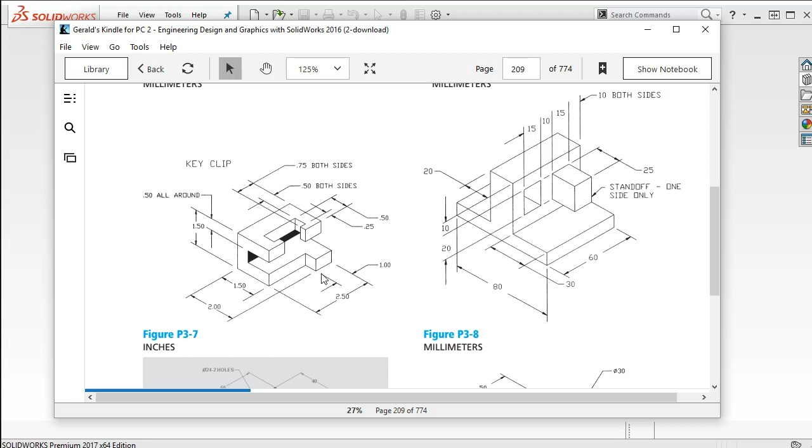Okay, figure P3-7. We have material thickness 1/2 inch all the way around. There are some manufacturing challenges with this one, so I want to take a look at those. But I think we can go ahead and build the C shape and add on the little tab and then make the cut through.

So I've switched to SolidWorks 2017, and we'll do a new part. This is in inches. And so far we're still kind of leaning towards staying in the front plane. So where 2016 went kind of neutral, the feedback from the users brought back some more of the colors and contrast, but for the most part very similar to 2016.

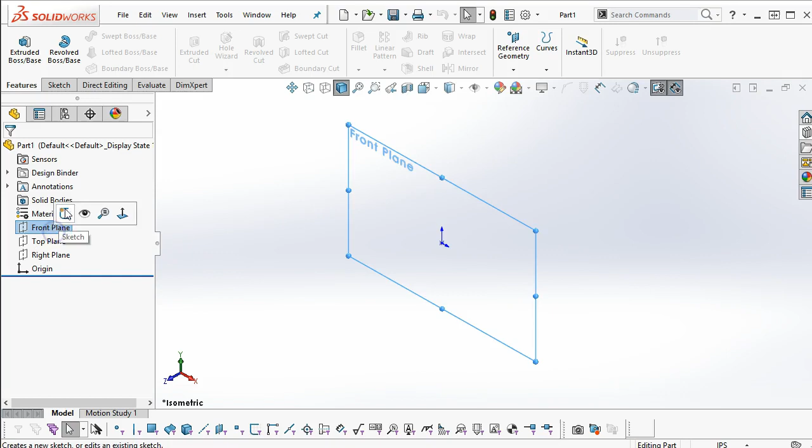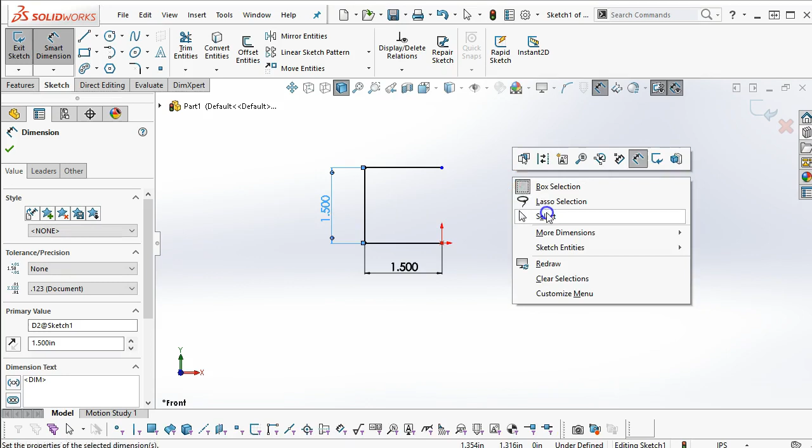So we'll open up our sketch, and it's your choice to do the thin feature or the offset. So we have a distance of 1.5 and a height of 1.5. Okay, and then in this case I'm going to go with the 2 points and make those vertical. Alright, so just to run through the thin feature again, things to watch out for. Go back to the front plane so that I can check my direction is correct.

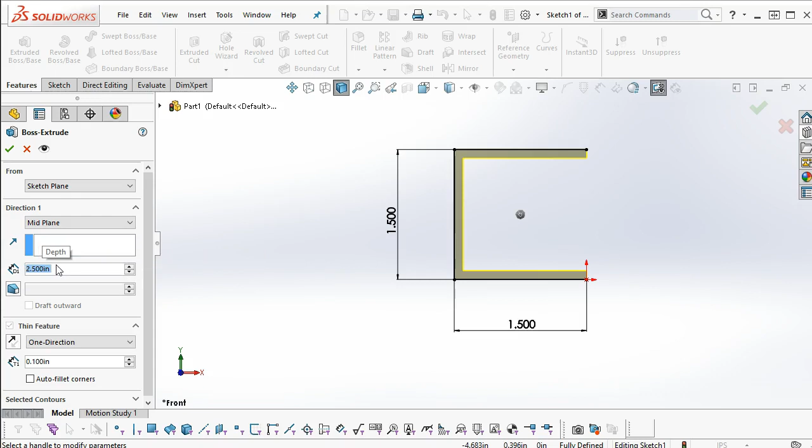So no great advantage to doing a mid plane on this one for 2.5, but let's go ahead and slip it in there. So 2.5 on the depth, and then 0.5 on the thickness of the material, and we go ahead and accept. Alright, so that gives me the C shape. I'll open up a sketch on the bottom, and again I'm not having this rotate into position.

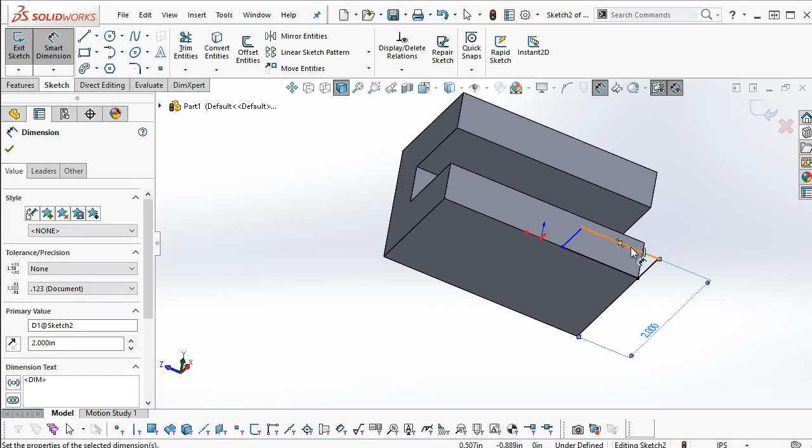If it does rotate into position, we can just rotate it back a little bit and make the adjustment. But getting used to sketching in that 3D space out of position, not normal to the sketch, that comes in handy. So we're going to extrude. I haven't used up to vertex, so let's go to a vertex, and we'll bring it up to that point.

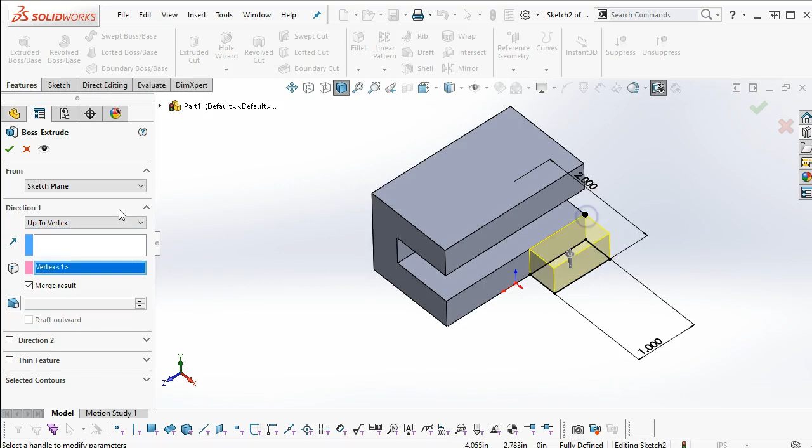Up to surface, up to next might work. Up through all should bring it up. So let's see what the other ones do. Through all goes and finds the last piece of geometry. Up to next, not real happy. If it doesn't show the preview, probably not going to work. Up to vertex we just did. Up to surface would be the selection, and the last three really don't make a good fit for this geometry. So up to vertex, and we accept it.

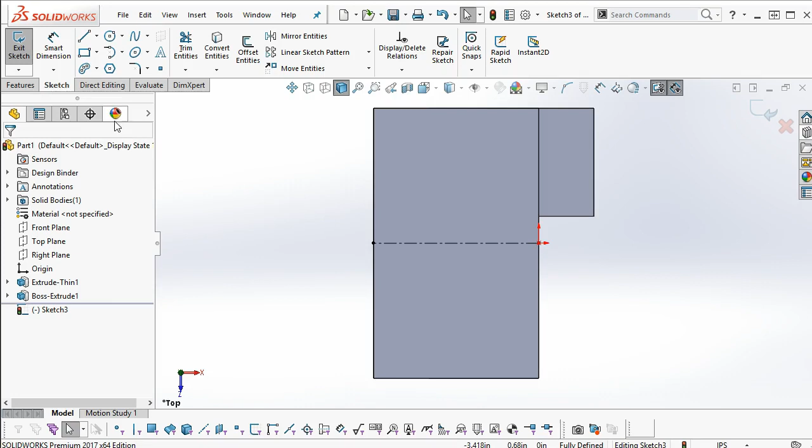And then let's go Control 5 or normal to, Control 8. I'm going to go ahead with a center line on this one, and we're making the cut. So we add 1/2 inch and 0.75 on both sides, giving me the symmetry. So I'll sketch my T shape, and not entirely sure that I want the midpoint, so I'm going to come off that midpoint just a little bit.

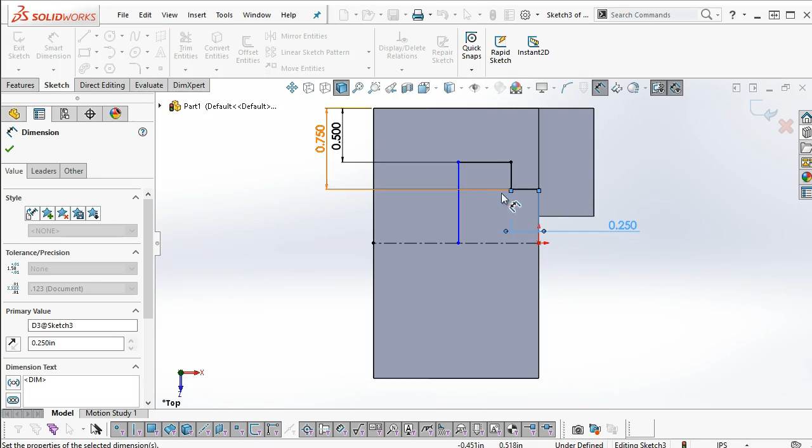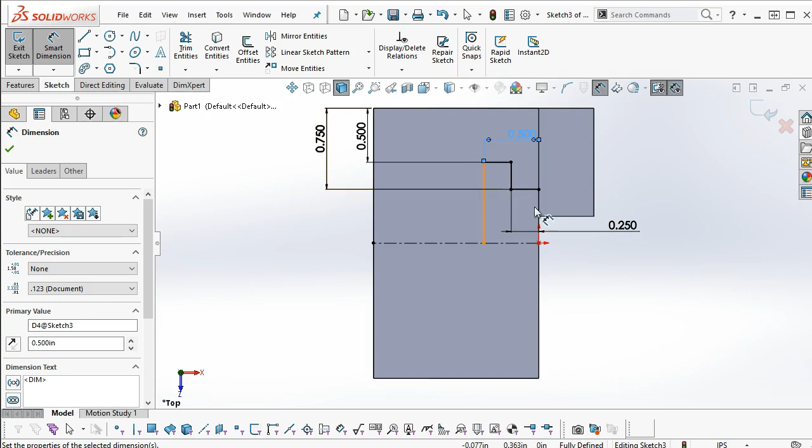And so the 0.5 and the 0.75. And then the depth, we have 0.25. And overall, now it's giving it 0.75, so making sure that I'm seeing where those extension lines are, because it looks a little deeper than that on the drawing, like it was supposed to be 0.5 overall, but we've got to go with the dimensions.

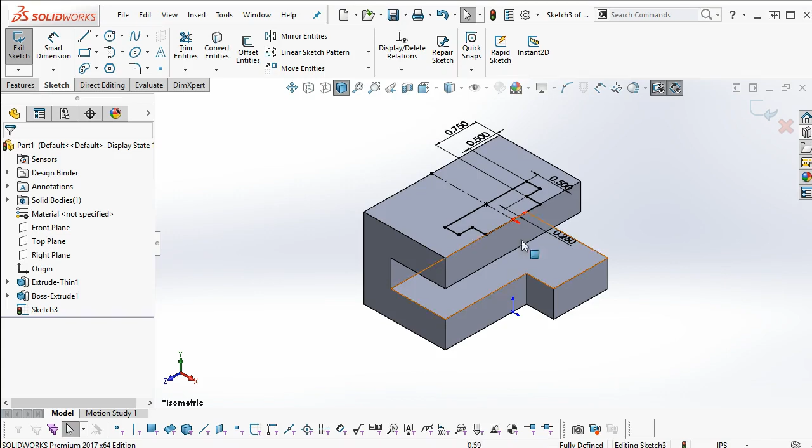Alright, so I did not get a line in on this forward section, so we'll go back with our right to left selection, mirror the entities. Control 7 takes me back to isometric, features, extrude cut, up to next. Alright, so through all would take it all the way through the part and geometry. So in design, we would want to verify that geometry.

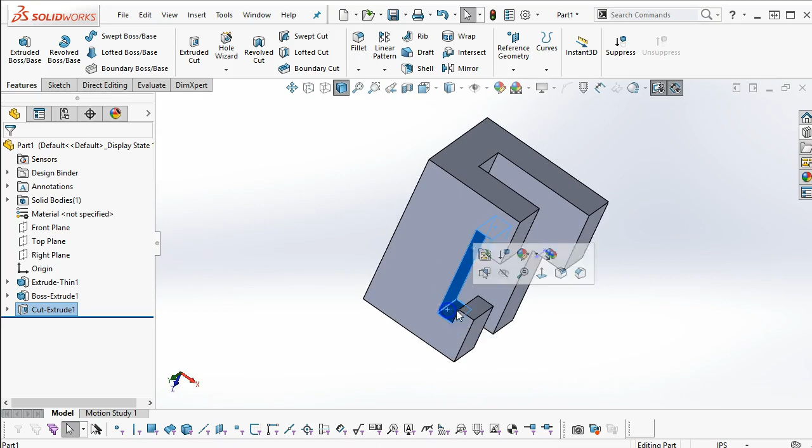So if I wanted to, I would select those faces, come and find the appearances, go into the face and highlight it with some color that makes it noticeable, so that when we take this into the assembly and I see, yeah, there's a mistake on the dimension, we can shift that 1/2 inch, but anything that helps me to call that out.

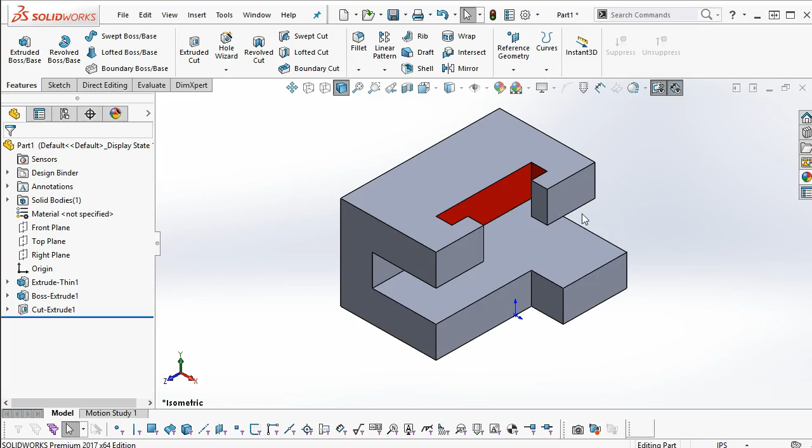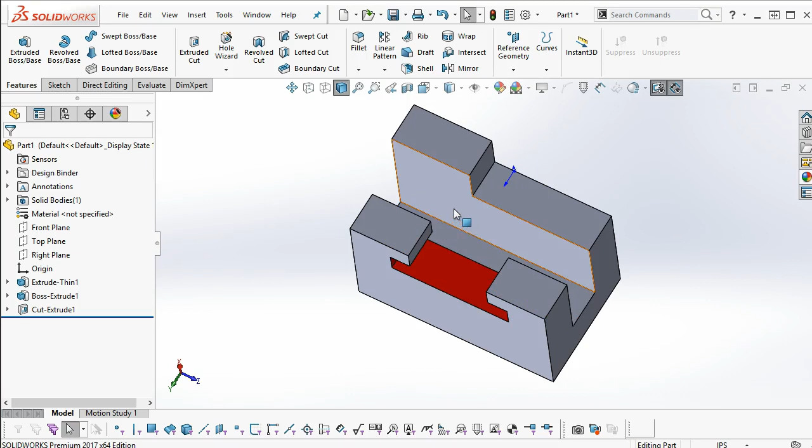Alright, so from a manufacturing standpoint, the slot is a little bit of an issue. So if it's 1/4 inch high, 1/4 inch deep, and with the shaft size on a T-slot cutter, we can get a tool in there and probably not run into the back face. We're not going to be able to EDM because it terminates. So when we're picking that geometry, we want to make sure that we're able to make these cuts.

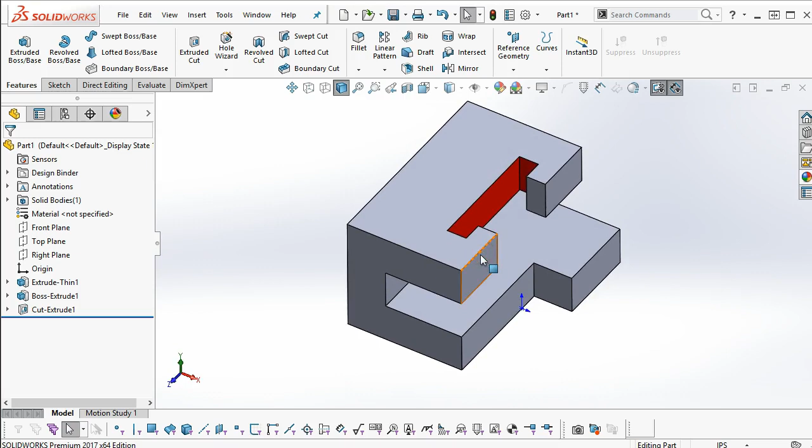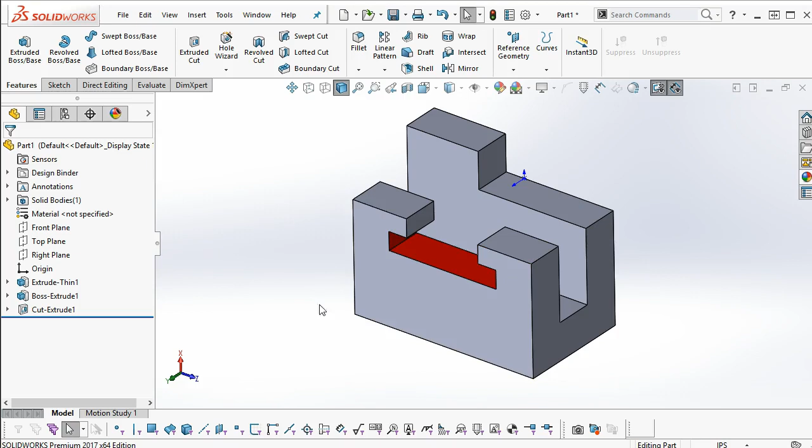All right, so looking at the geometry, if I start off with a block this big, I can remove that material. I can send the slot down through the center, and then see where we get with removing the pocket, and then the T-slot cutter comes in and makes those cuts. Alright, so the issues are not insurmountable, but I would want to also analyze this geometry for manufacturability.